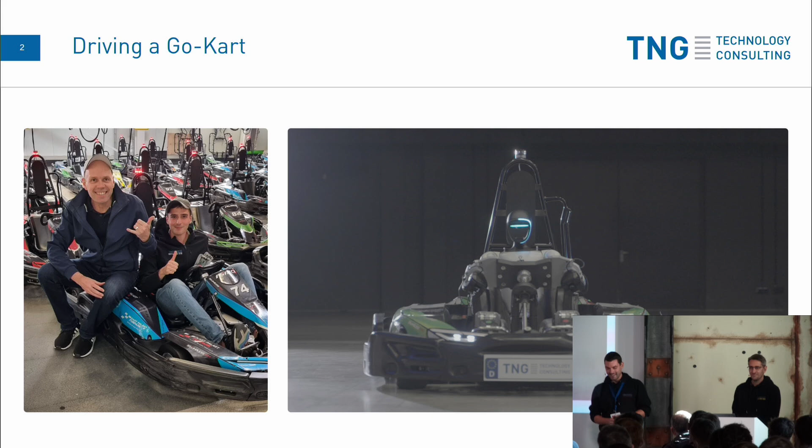But at least I have never heard the slogan, 'we're TNG and we fix your mechanics.' So we had to move quite a bit out of our comfort zone to make this happen. Let's see how we did.

Looking at the mechanical side of things, it's important when driving a kart to find a stable seating position to compensate for external forces while still maintaining the intended steering angle. For a human, this is quite intuitive because we subconsciously make little micro adjustments of our seating pose. But for a robot, this is a new task and not too easy.

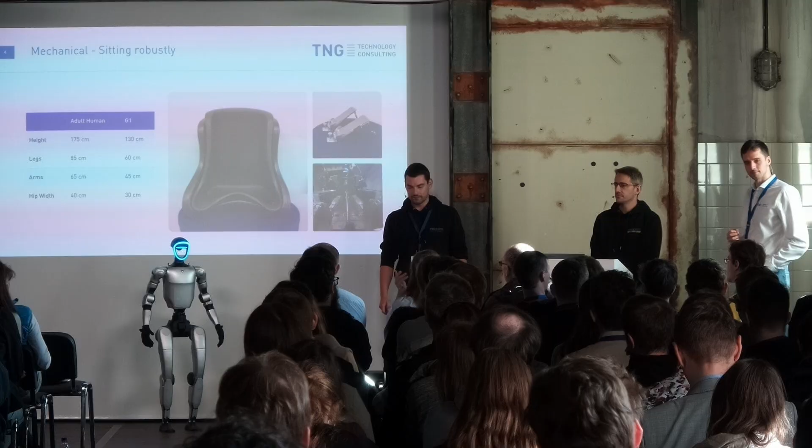The first thing that comes to mind when trying to seat this robot in the kart is that it's substantially smaller than an average human being. Indeed, when we placed the robot in the kart, it was sliding around a lot, within the factory setting of the kart that fits most humans.

Luckily, there's a solution for that exact problem, because children face the same issue once they are karting. By using not one, but two of those foam seat inlays for our go-kart, we found a good fit for our robot. The solution has the additional benefit of bringing the robot a little higher and more to the front of the kart, making the pedals and the steering wheel better accessible.

However, the pedals still were not reachable for the robot. Again, we repurposed a solution built for children, using pedal extensions that finally provided a perfect fit for our robot.

So now the robot has a nice seat and is able to reach the pedals. But what about the most central human interface in a go-kart? What about the steering wheel?

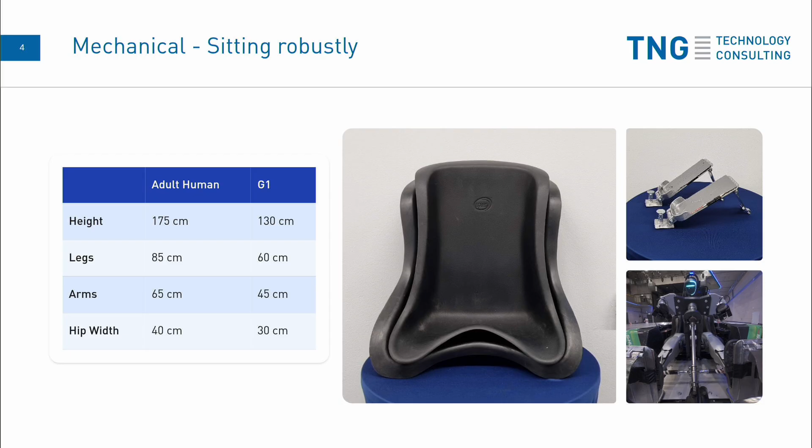Most steering wheels are built for human hands. And human hands are incredibly dexterous with 25 degrees of freedom and provide excellent gripping strength.

Looking at the hands of our robot, which is actually not this exact robot because this is the cheap version, it has just silicone hands without any motors. The robot that we are actually using in the go-kart has more elaborate hands, but it has only 3 fingers and about 9 motors, 9 degrees of freedom in one hand. These hands are obviously lacking the dexterity and gripping strength to properly grip the steering wheel and turn it.

To face this issue, we first broke the problem down to basically handcuffing the robot to the steering wheel, so it's kind of doomed to drive. This prototype was quickly built with a little woodworking and 3D printing.

This concept of just handcuffing the robot to the steering wheel worked so well that we kept it for the final solution, in which we just redesigned our 3D prints a little bit, but the concept stayed the same. This solution also has the advantage of further fixing the robot in its driving position, making all the downstream tasks way easier to solve.

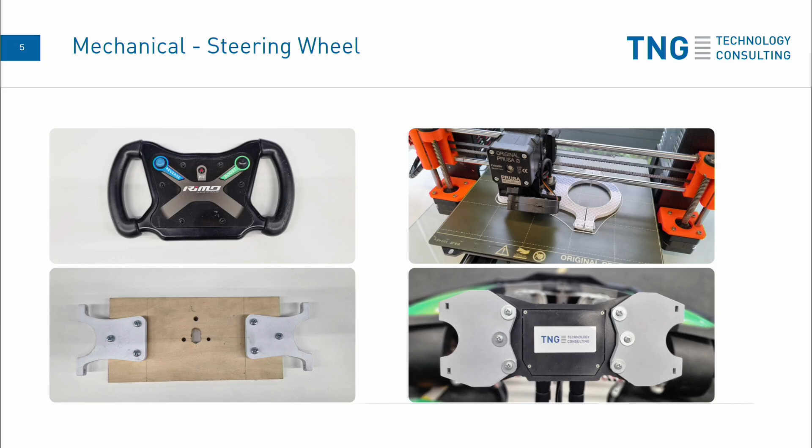All right, so that solves the mechanics. Let's look at the electrical adaptations that we had to make to our go-kart. With the original steering wheel, one can simply press and hold a button to drive backwards, and backwards is sometimes very needed for the go-kart because the driving radius is quite big.

And being handcuffed to the steering wheel, this wasn't an option for the robot anymore. Therefore, we had to mimic the button press in the low voltage system of the go-kart somehow. This is not too hard to do. We just used an electric relay controlled by an Arduino, and that worked like a charm, out of the box, no problem at all, easy peasy.

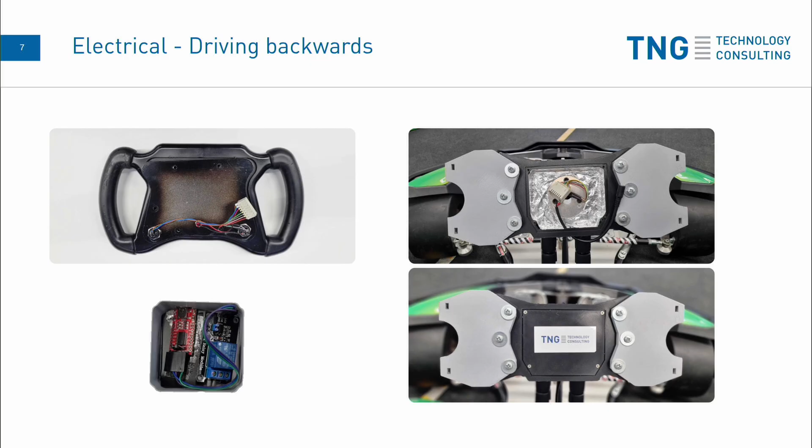But once we placed the robot in the kart and turned it on, the Arduino was behaving completely random. And we slipped into one of those feared debugging hells, didn't know what was going on, started questioning ourselves. But finally, we noticed that when shielding the Arduino with our bare hands, it was behaving deterministically again. So how can that be?

We finally came to the conclusion that the robot is producing such electromagnetic smog and radiation that this affected the electronics of the Arduino heavily. Now that we identified the problem, the solution was also quickly found. We just covered the insides of the housing of the Arduino within the steering wheel with aluminum foil, and that worked like a charm.

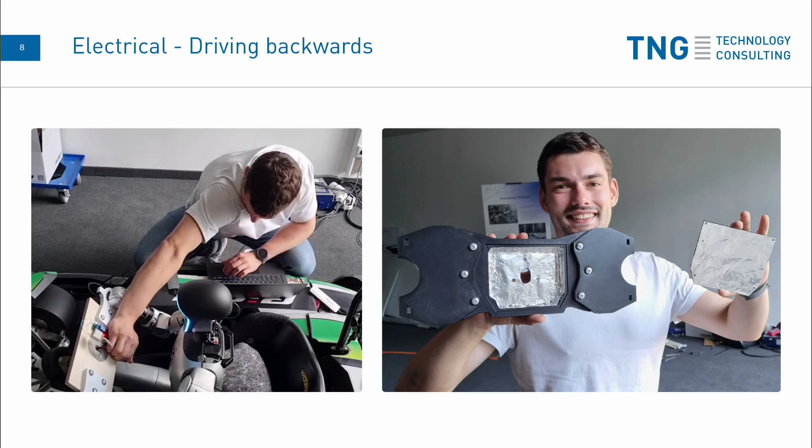So now that the electrical and the mechanical problems are out of our way, we can finally move on to our home ground and solve the hard IT problems. The first problem was that we couldn't move the joints, so we had to learn how to program the robot, and Unitree is providing an excellent SDK for controlling individual joints, and we can just send a target value to one joint. This directly solves the problem of accelerating and braking, because we only need one joint for that, right? So let me replay the video.

This is one of the examples when we first learned how to control a joint. We don't need more than just the ankle joint to press the pedals, and that's the solution that we are still using.

Ah, cool. Thanks, Thomas. Solve hard IT problems. Exactly. Yeah, so this is basically braking and accelerating at the same time. Of course, we do this differently now.

But steering is a little bit more complicated, because to steer the steering wheel, the hands have to perform a 3D arc trajectory while still maintaining the same distance between two hands. And to make things even more complicated, the pose of one hand is defined by the kinematic chain of one arm, which has 7 degrees of freedom compared to the 6 degree-of-freedom configuration space of one hand. This means that there are infinite solutions for each pose of the hand.

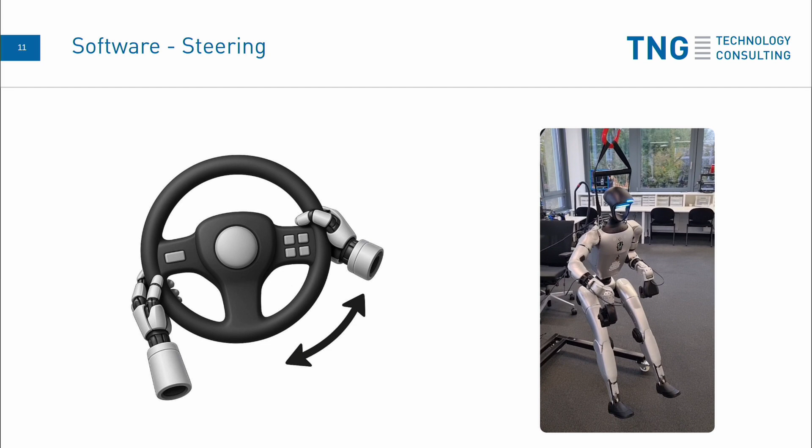Here you can see the robot booting and getting in its driving position, and you can see as it's lifting its legs, there's a lot of core strength now, and there you can see the steering trajectory being performed. It's a little jerky, but if the robot is handcuffed to the cart, that's enough.

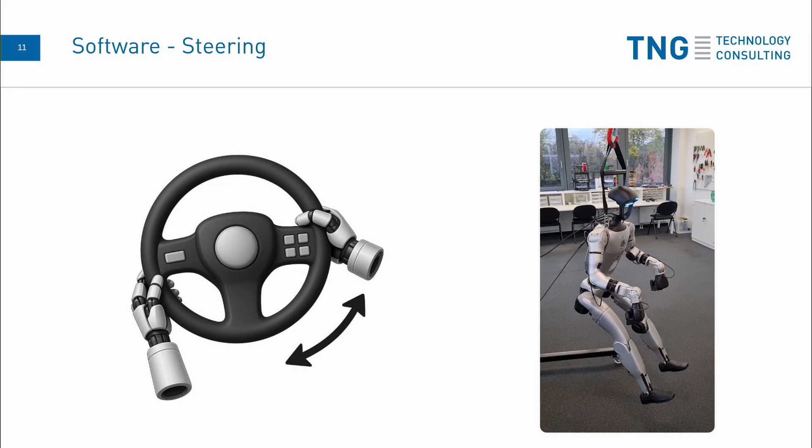And it looks absolutely hilarious if it does, a robot looking like that. Yeah, absolutely.

On a crane. Exactly. So now all components of driving the cart are solved and integrated in one system. And it's important to note that all those components are related across domains with each other, so changing something in one domain can have very well side effects on any of the other domains. We experienced that with our Arduino, because the mechanical decision of placing the Arduino close to the robot had massive effects on the electrical domain. Therefore, integration can be tricky sometimes with such systems and needs to be tested thoroughly.

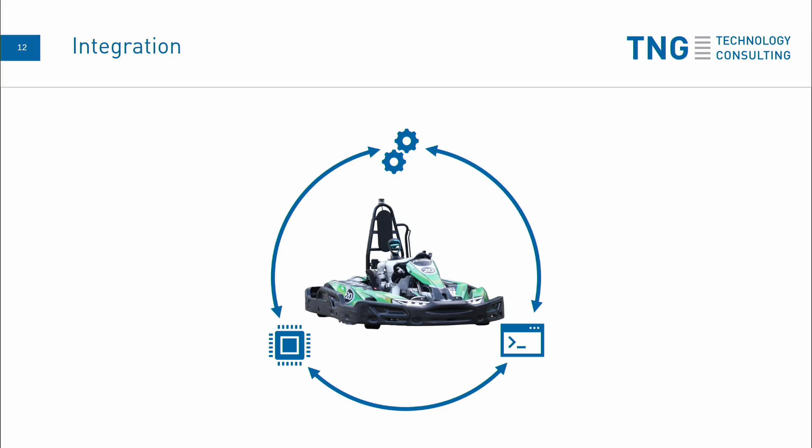However, now everything works brilliantly, and it's a lot of fun, and we can't wait to show you.

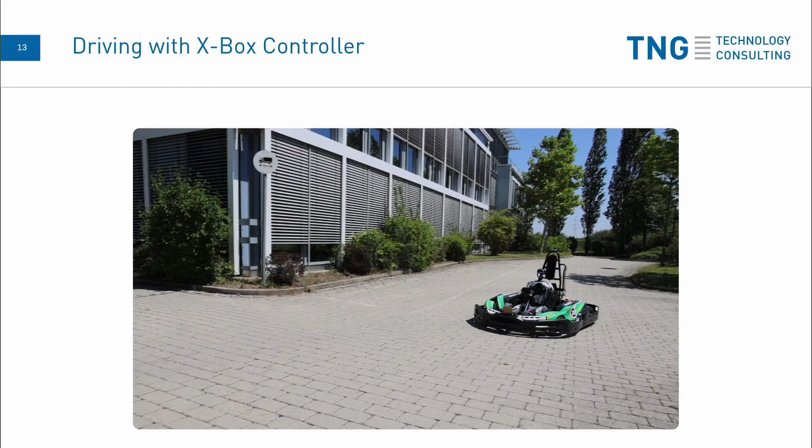So here's our first proof of concept, in which we just did a key mapping to an Xbox controller and drove the cart like an RC cart, and it's just amazing to see the robot drive the cart.

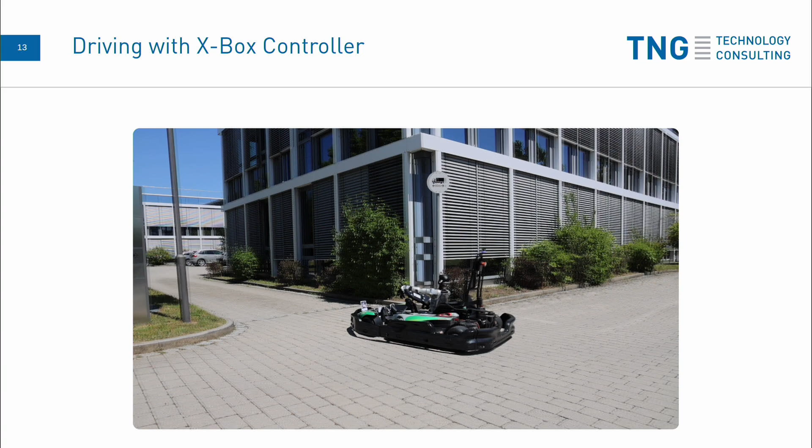Now that we've controlled the cart, we should also think about letting it drive autonomously. Therefore, we need a lot of different hardware, a lot of things to actually see the environment. And this is where the sensors of the robot come in.

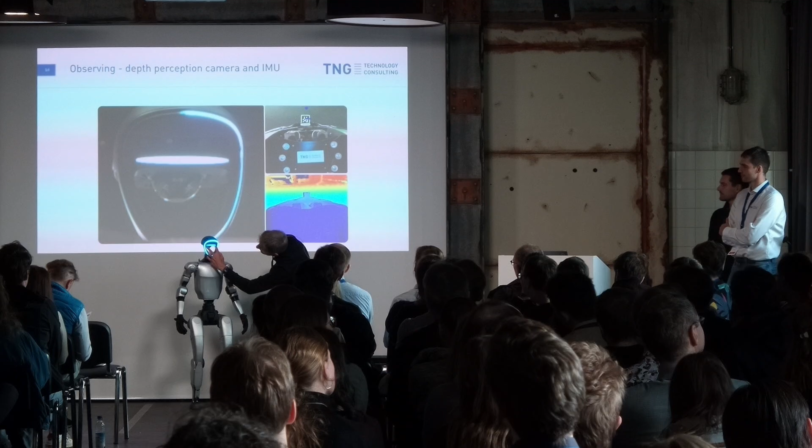Here you can see basically the most important sensors. If we have a look at the face, there's an RGB camera. Up here, there's also a few more cameras. Here's a LiDAR sensor, and all of those can be used to really control the car.

The RGB camera will basically work like a webcam, so you will have a picture like that. For the 3D perception, you will basically get the same picture as you have with the RGB camera, but with different colors, and the colors now reflect the depth that the pixel is away from the camera.

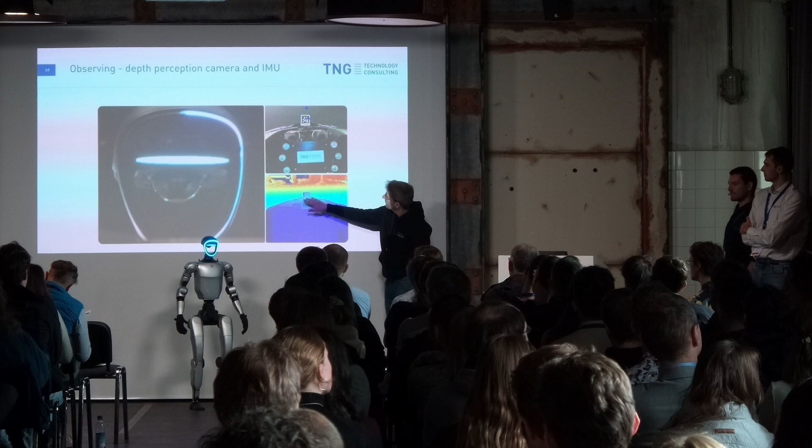This blue area here is pretty close to the viewer, and here we have something that is still close but not as close as the steering wheel here, and then the further away the object is, the redder the image gets. So this is basically like a heat map.

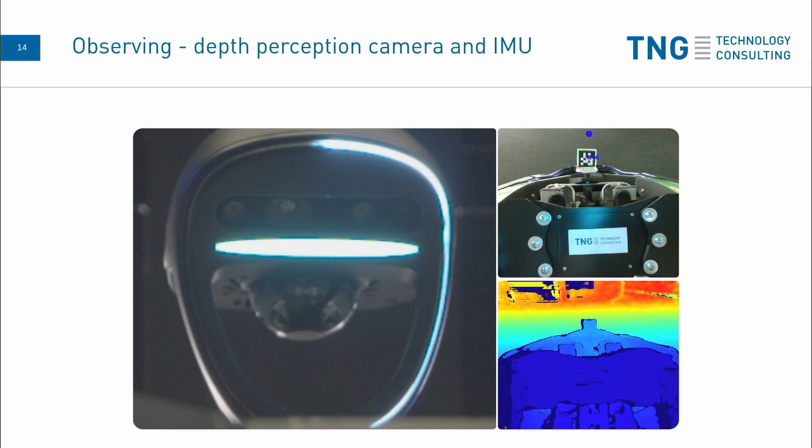If we want to do even more things with 3D maps of the world that we get, we will probably use the LiDAR, which is this thing down here. It is a 3D perception. It offers us a 3D perception of the world.

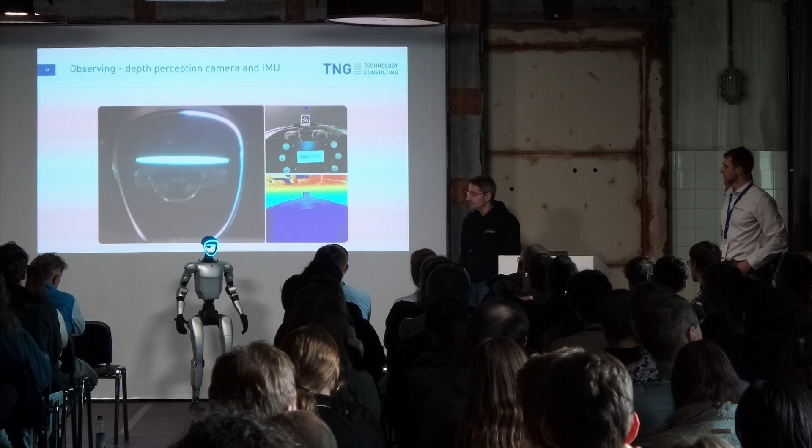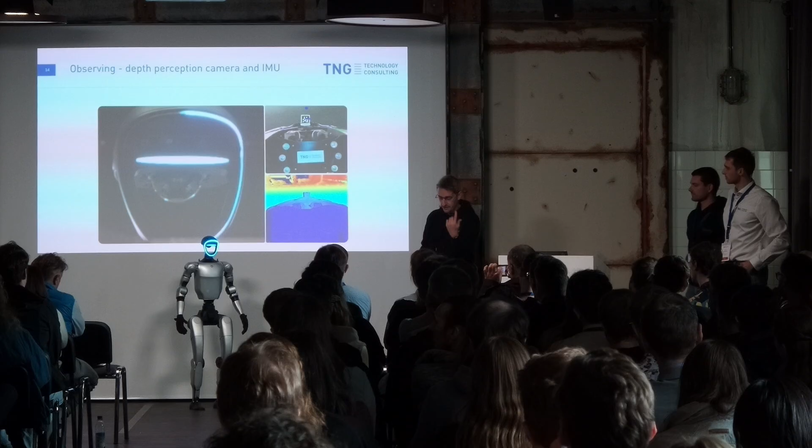What we get is normally a point cloud, and with this point cloud, for every point that we get, we have a direction that the laser this LiDAR is based on is currently turning, so it's turning around all the time and giving us feedback of the real world, and at the same time it also gives us the angle.

If you have this image now, you could reconstruct a 3D representation of the world around you with multiple sightings that might be possible using techniques like simultaneous localization and mapping, or in short, SLAM. And you can also combine that with other sensors to get an even more precise view of the world.

But we didn't need that actually for our first use case, which was somehow semi-autonomous driving, and this is what we did here. So here you can see basically the RGB image from the camera, and what we tried to do now is implement some basic line following algorithm.

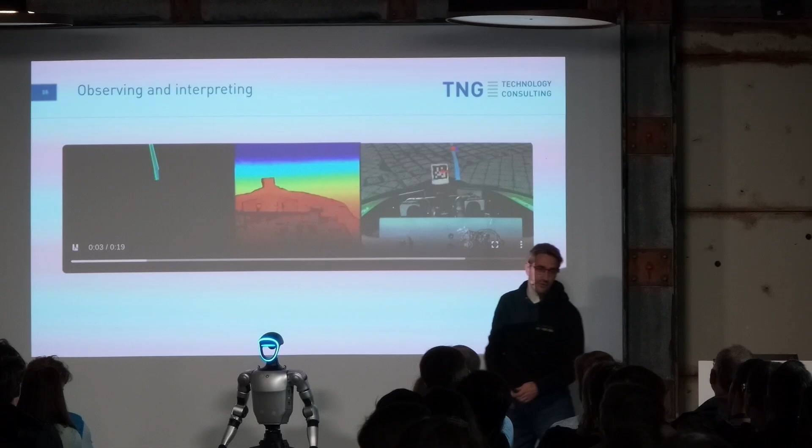And there the depth perception comes in, because we can just filter out everything that is pretty close to the camera. And with that, we can then just mask that out and just use the part that is relevant for us, do some line detection here, and we can then use some standard algorithm, Hough lines here, that you can see in the picture.

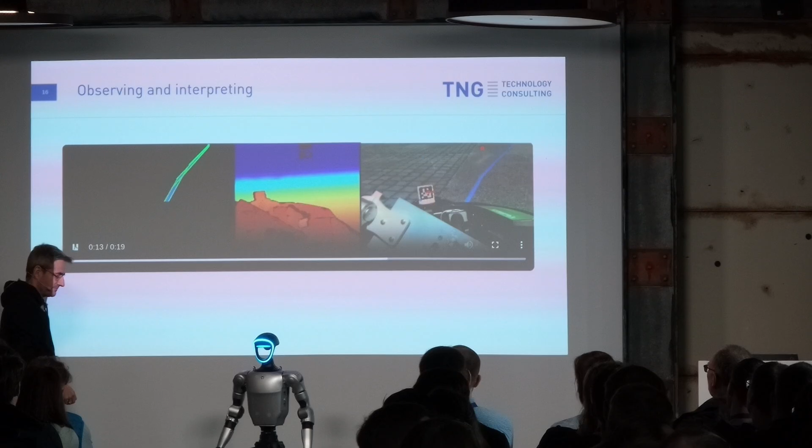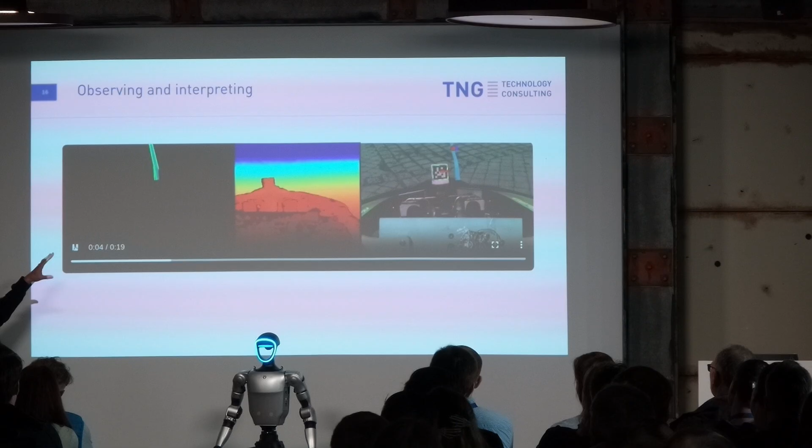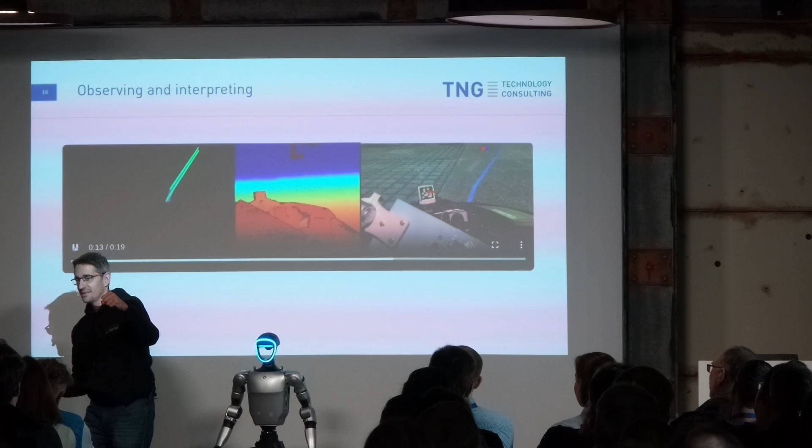With that, we can then move the cart relative to the line position that we have. Unfortunately, there's still a problem here, because, as Tobias said before, when the robot steers in this direction, it also moves its hip into this direction. So the camera, unlike with other cameras that we have on cars, is not always perfectly aligned with the center of the car. So we also need to find out where the center of the car is located.

And that's where this beautiful part comes in. So this is an ArUco tag. It looks like a QR code a little bit.

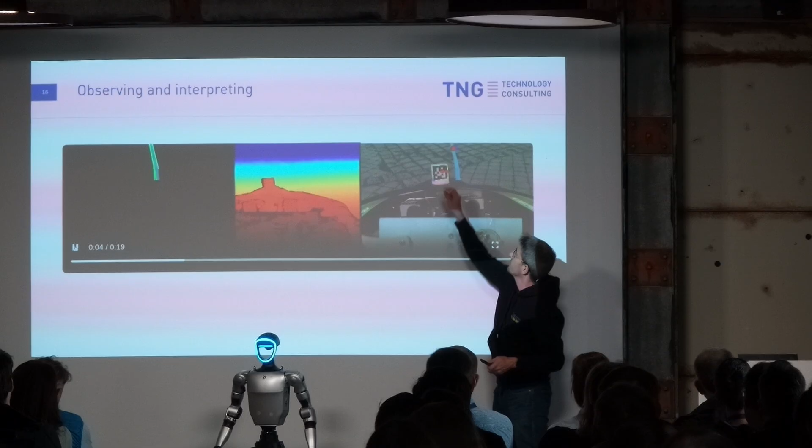We can detect that using open computer vision libraries like OpenCV. With that, we now have the center of the car, which is the center of the Aruco tag, and the center of the line where we need to go. With that, we can then define in which direction the car will be steering.

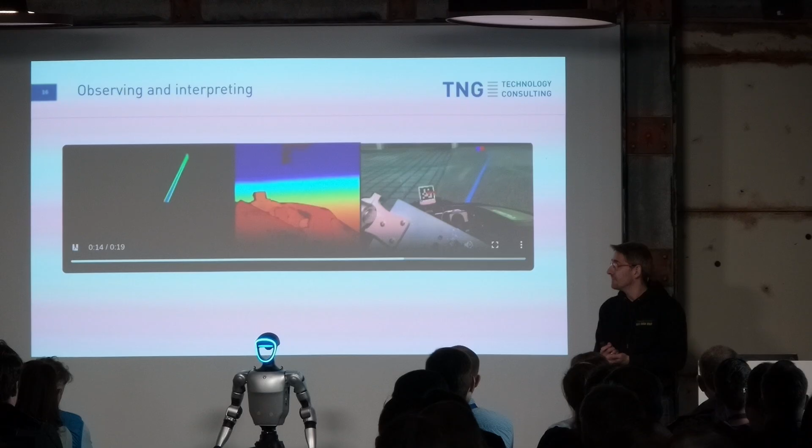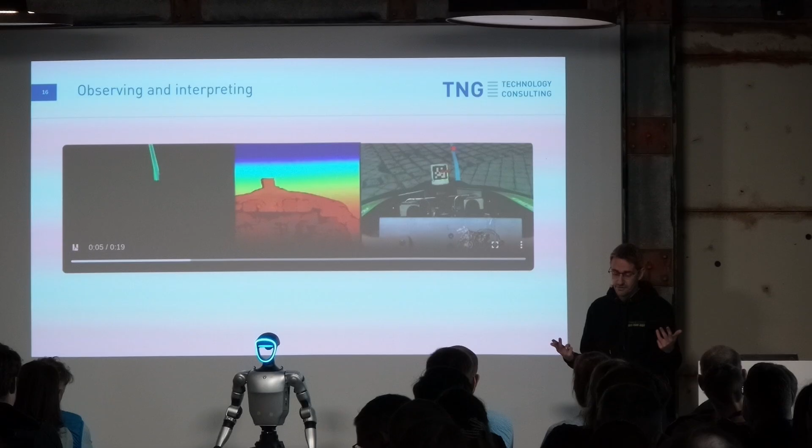So what else do we need to make a robot do all these things? There are three main parts which contributed to the revolution in robotics, which made this little robot possible.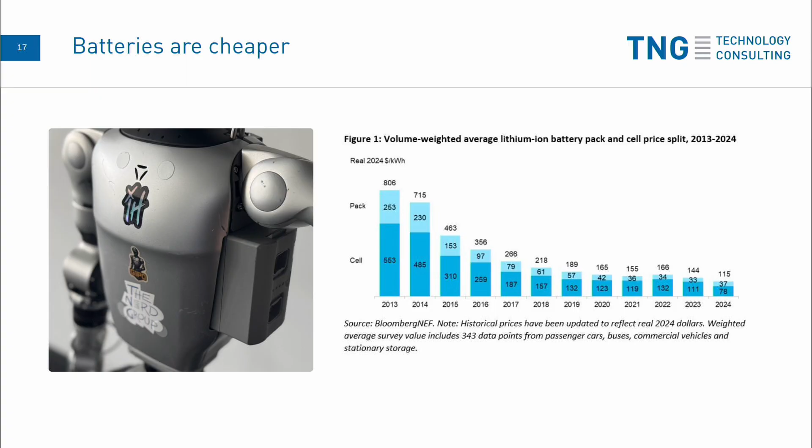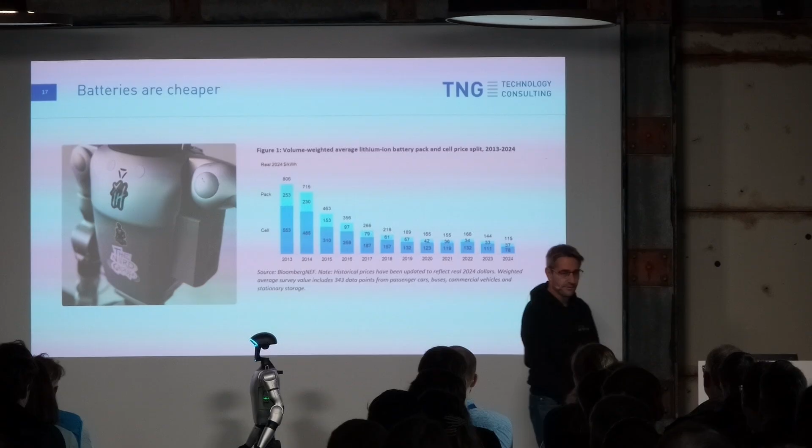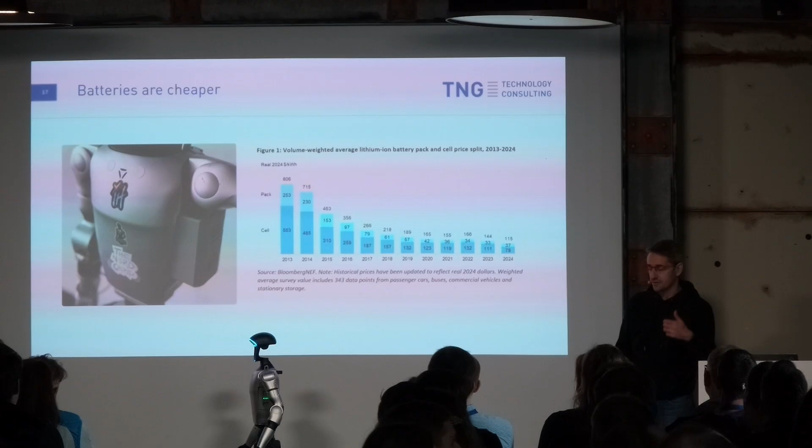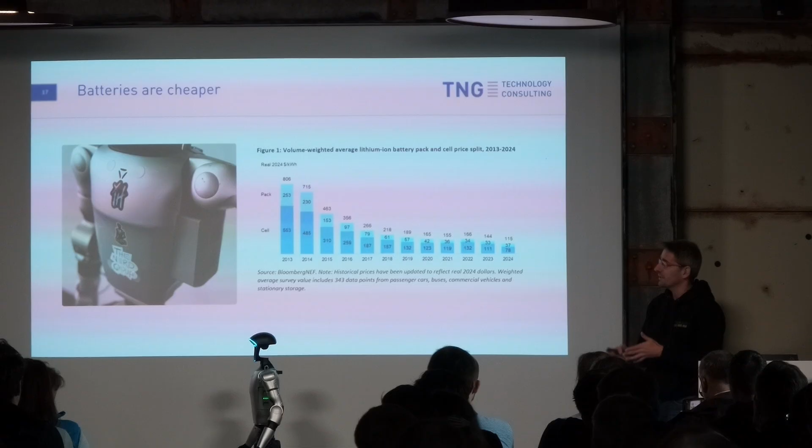The first thing we need is the battery. If you turn around, you can see underneath the elbow there's the battery. The battery is pretty small for such a huge amount of power that it hosts, and this has changed in the last few years. Battery density has gone up significantly, so we need less volume and less weight for the batteries of the same capacity. This is one of the key drivers why we can even do this today, and at the same time the price has also gone down, which enables even us as TNG to own such a robot.

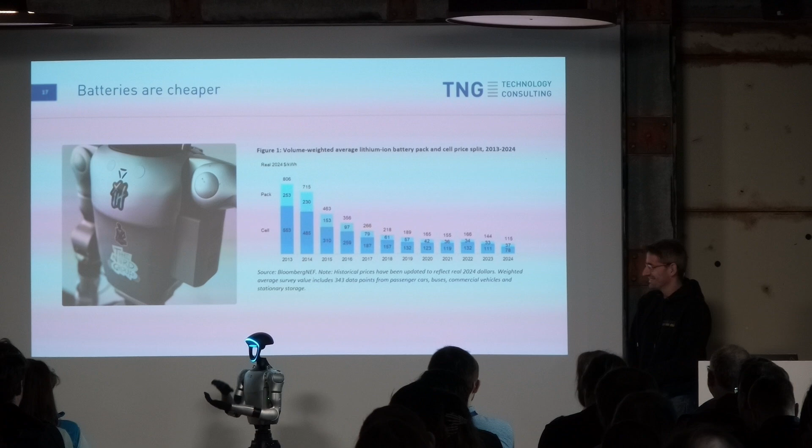If you look at this arm, first we have the shoulder motors here, then we go down to the elbow motors, then some wrist motors for the more advanced one, then motors for the fingers, and so on. All of this weight has to be lifted by the shoulder motor, while at the same time it also has to provide extra lift to carry out its own task. This kinematic chain that we have with these advanced robots is pretty hefty.

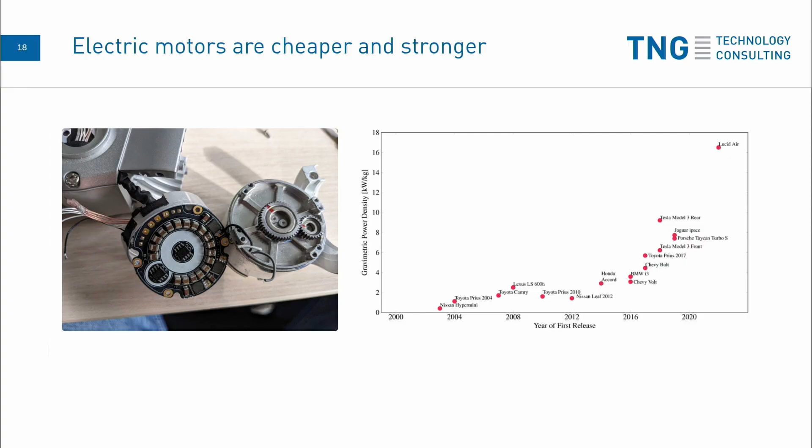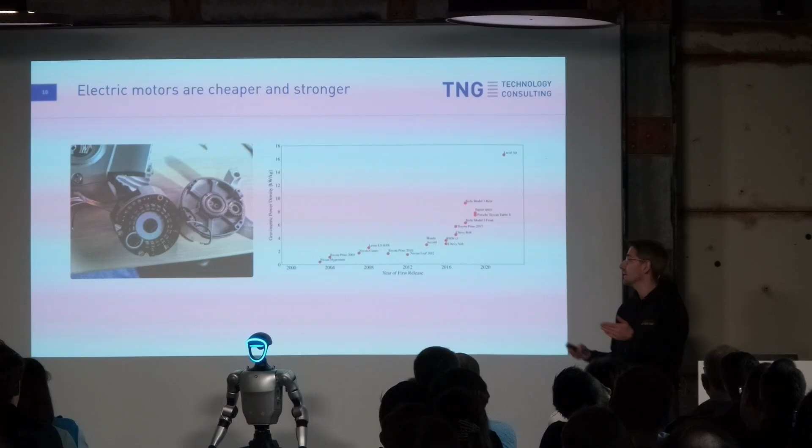And with that, we also need very strong motors. With the upcoming of neodymium magnets in these motors and some other advances, we've gone a long way from the motors we had in the 2000s to what we have today. This is of course also due to the advances in the car industry, which is somehow the driver of this whole revolution in the electric motor.

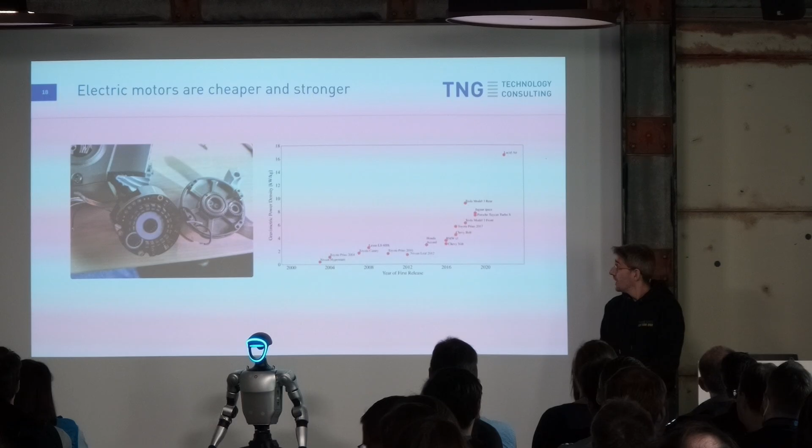The last thing, pretty obvious but nevertheless very important, is that we also need some compute power within this robot. You cannot just have a microcontroller in there - in order to have some serious AI going on within the robot, you need real compute power. Nowadays it's possible to have very advanced chip card-sized computers that also offer us the possibility to process neural networks inside, with some pretty interesting VRAM specs and so on.

This is of course an ongoing thing, it has been going on since the 60s or something like that. But nevertheless, it is also possible to be completely autonomous for the robot this way.

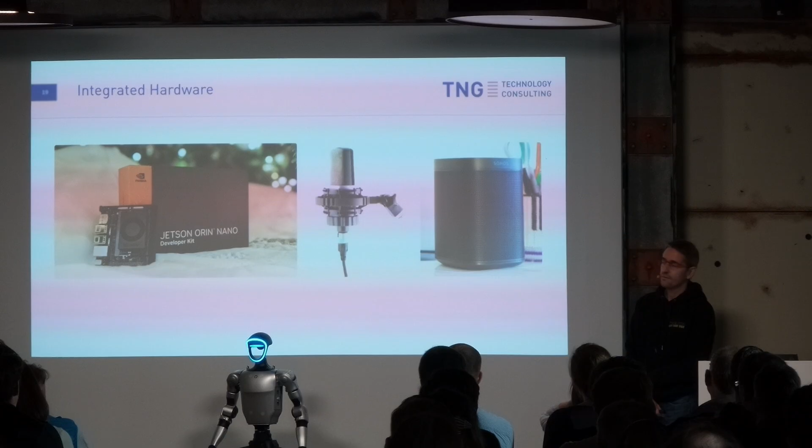And then, if we want to talk to robots - the use case I want most is a robot that brings me coffee, so I also have to tell it to bring me coffee. The idea behind that is of course that it can also hear me and talk back to me. For that we don't only need the neural networks, like speech-to-text or text-to-speech, but we also need microphones and speakers in the robot itself, which it also has.

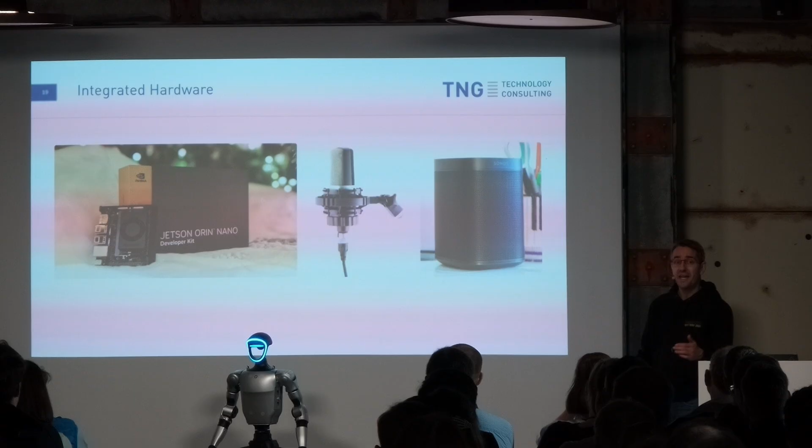So now that we know what we need, now that we have some software to do that, and we can also drive the kart, what did we actually do with it? One thing is we went to the Deutsches Museum with it, and here you can see some pictures from that event. We tried to put a smile on a few kids' faces and make them think about robotics a little bit more.

You can see that we walked around with the robot, and we also drove around with it. We blurred the license plate - not sure why we needed to, but nevertheless, okay. One reason I think we blurred it is we also put some children on top of the kart and let them drive with us, but that's a different story.

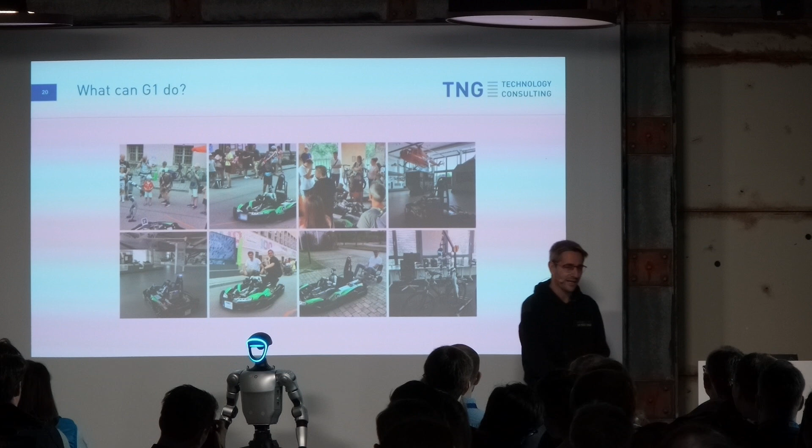Nowadays, it's not even necessary to put the trolley on the sides of the robot. We can also have a trolley in the back, so you can relax and enjoy your trip with the robot who is driving itself.

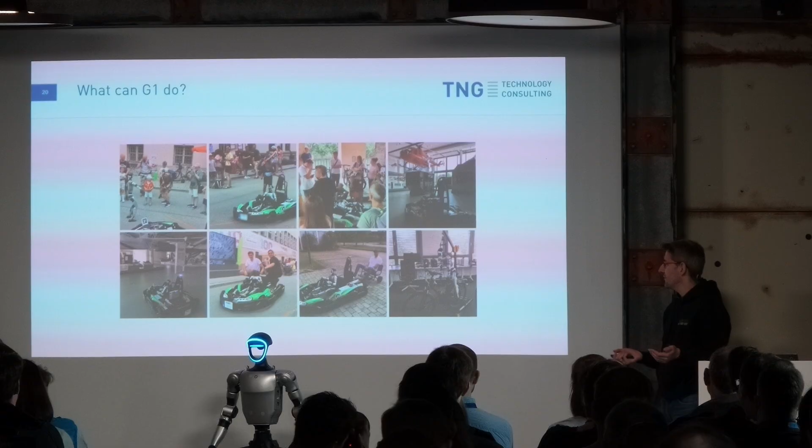And nowadays we are also trying new things out. So we're putting the robot on a bike and letting it drive the bike. Unfortunately, this work is currently ongoing, so it's not finished yet, and it also broke the bike already once.

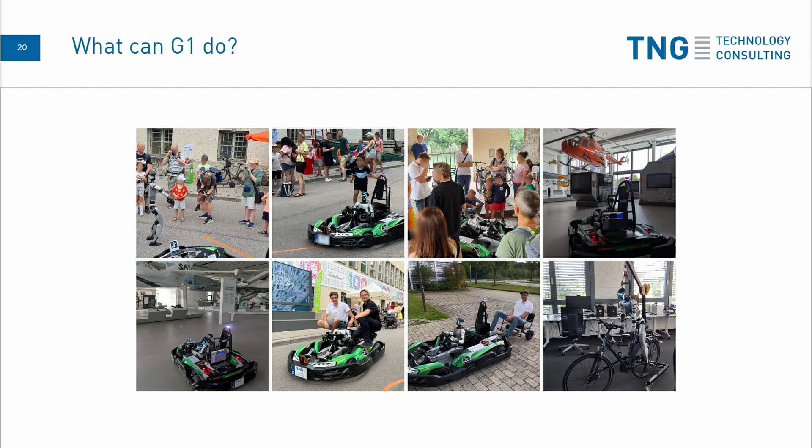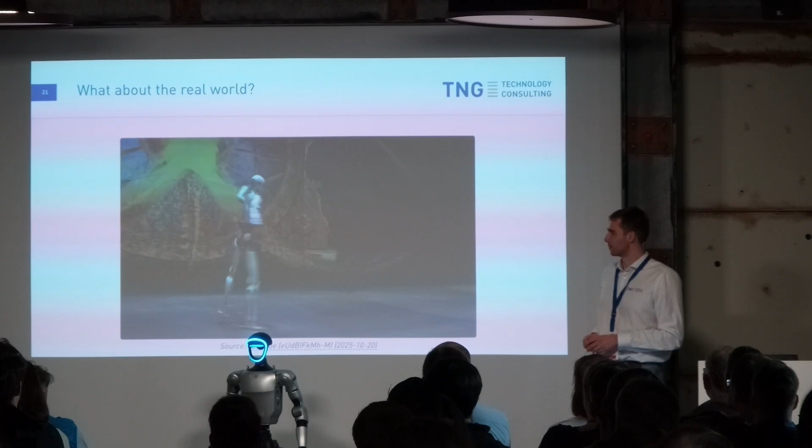Right, so the advances are amazing. We have these humanoid robots that are consumer products that can do, I mean, this video is buffering, but the robot is really smooth. They can do these sort of amazing looking movements.

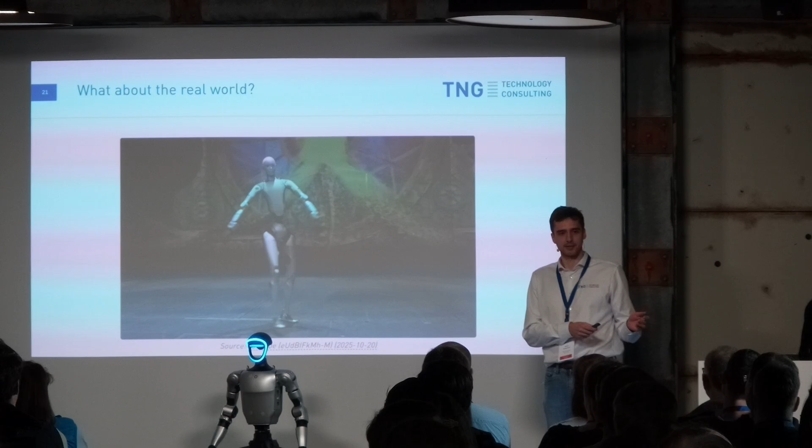But I want to go back to the original question, which is, to what extent can they be helpful in the real world and use the world that's made for humans? I'll consider an example: would you have this robot bring you coffee or do work with you inside your home? So the most important thing for having a robot at home is that it's safe.

Right, so bugs happen. At the moment, these humanoids are fairly complicated, and enthusiasts are programming them, but they're not particularly safe. Bugs happen. But even worse than that, if they're controlled by a human, it's fairly hard to program them so they're precise, and for humans to control them precisely.

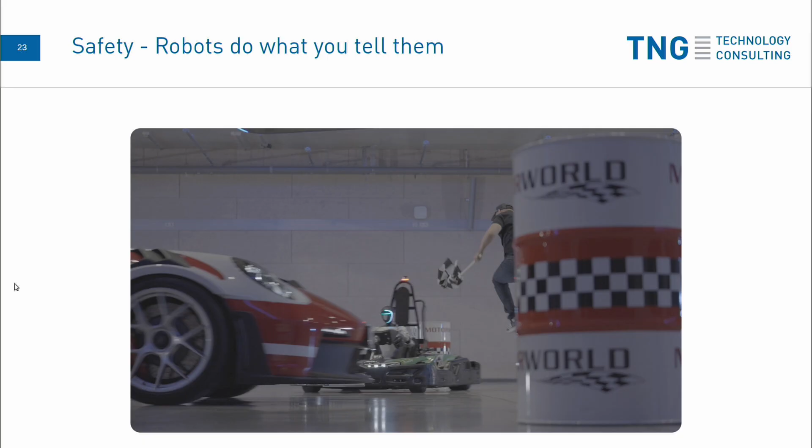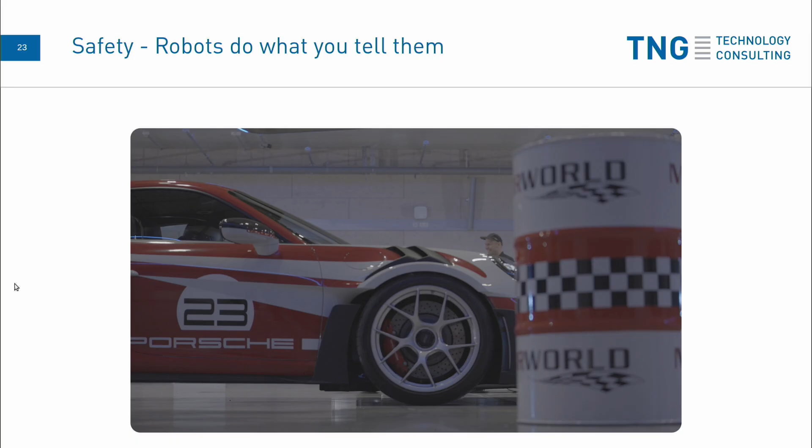So here we were filming a race between a go-kart and a car. But the floor was slippery, and I misjudged how much I should turn into Henrik, and he had to jump out of the way. But I'm glad to say we haven't had any accidents, and we only operate at 30, 40 kilometers an hour when everyone's paying attention. So safety is important, but even if humans are controlling the robot, it can be unsafe.

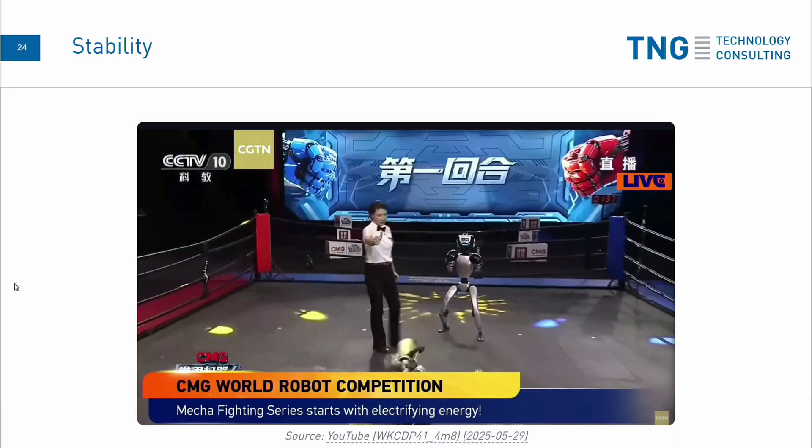The next point is stability. So these boxing matches are again super interesting, but they point to a very important thing, which is you have humanoids on 2 legs, which means you always need power in order to be stable. If you have this at home and a dog, for example, runs into it, you have the risk of it falling over and really damaging your property, which obviously isn't desirable.

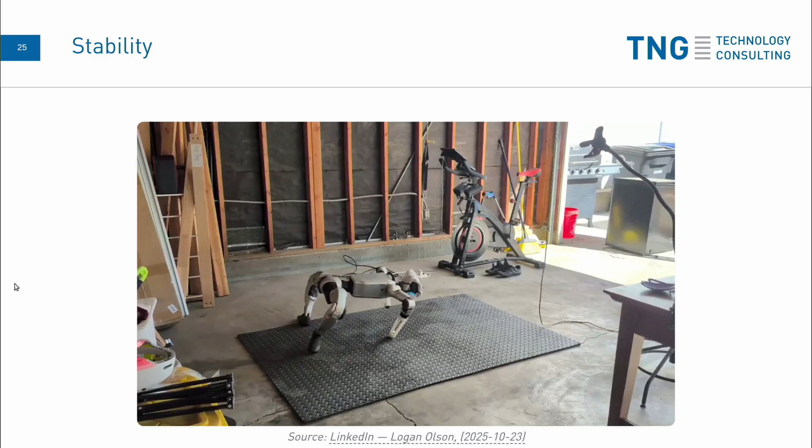And there are several ideas of how to cope with this. One of the points is you can reduce the center of gravity by using the hands also as legs. This is a video from yesterday. It's exactly the same robot, but not creepy at all.

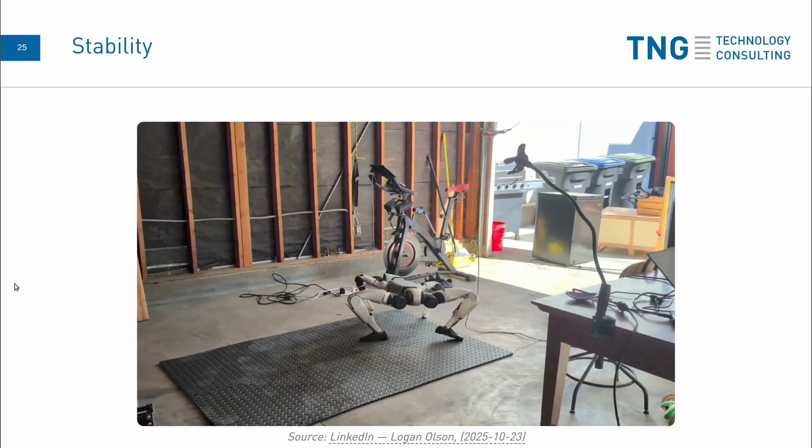But it's been made safe for home use, sort of. More generally speaking, you can lower the gravity, but actually, if you've got flat surfaces at home and no obstacles, you can replace all of the legs with just a wheeled system, which is very stable, and then you maybe have the intelligence of the arms and the camera to do the work that you wanted to do. But at least it's a step in the right direction of making these humanoids safer.

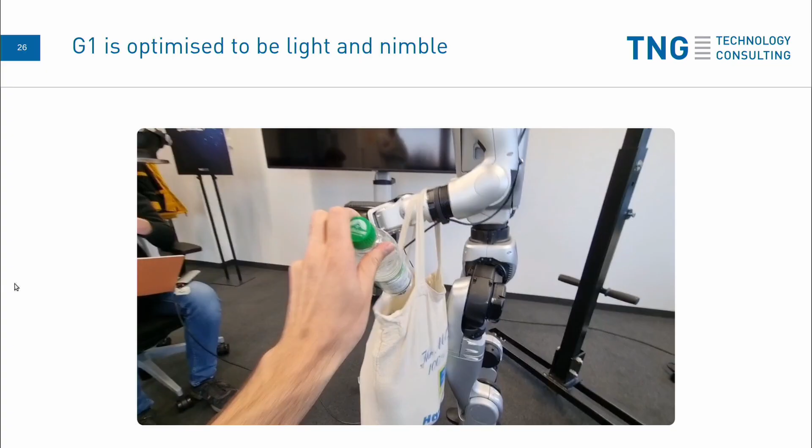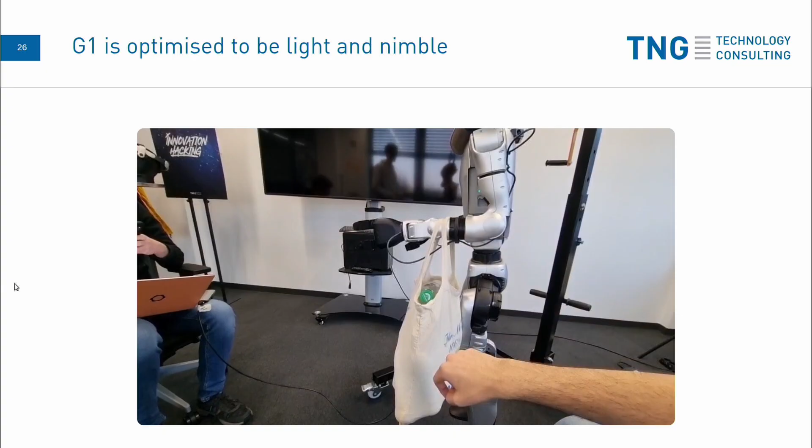Here I was doing a gym session with our robot. We were doing lifts. Before we bought the G1, I wanted to measure how much torque the elbow joints could produce, so that we could make sure there was enough torque to steer the steering wheel. I filled up a bag with bottles of water and measured whether all of the joints could still work. We realized it has just about enough torque to turn the steering wheel of an adult go-kart, but it wouldn't have enough strength to, for example, lift a 5 or 10 kilogram rucksack that you have at home. So you're fairly limited. Even though the motors have gotten a lot better, they're not perfect yet.

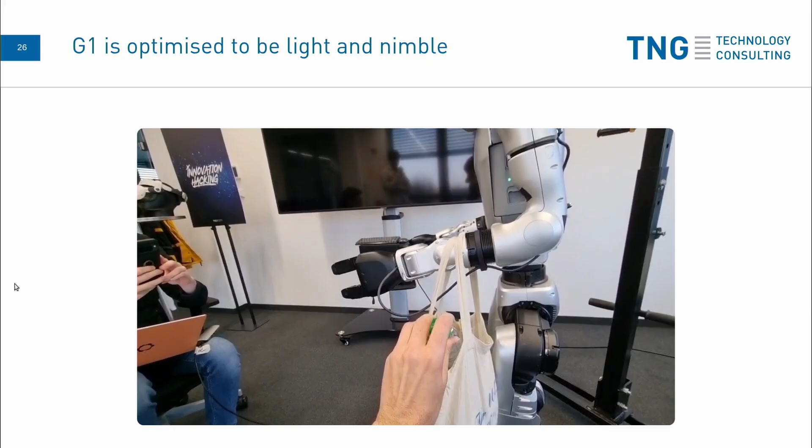And this is an active decision by Unitree. The G1 is sort of light and nimble. You can put in stronger motors, but then again, you have more weight and more risk of serious injury. The motors are just about strong enough to steer a steering wheel, but they get damaged quite easily, the elbow joints, because you're sort of operating at limits. In fact, just before one of our presentations, the robot broke, and we had to replace the motors.

Here the thing is, these Unitree robots are fairly new, which means getting the components you need to replace it is fairly difficult. The delivery times can be several weeks, and it costs several thousand for the motors. But replacing it is actually fairly easy. You can just unscrew the forearm in this case, cut some wires, and then solder on the replacement part.

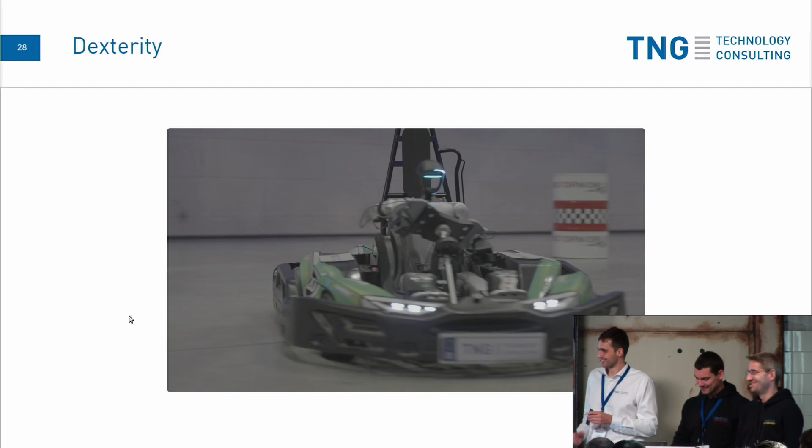Oh God, yeah, that's not gonna be a good driving experience. I think he needs to do a test first.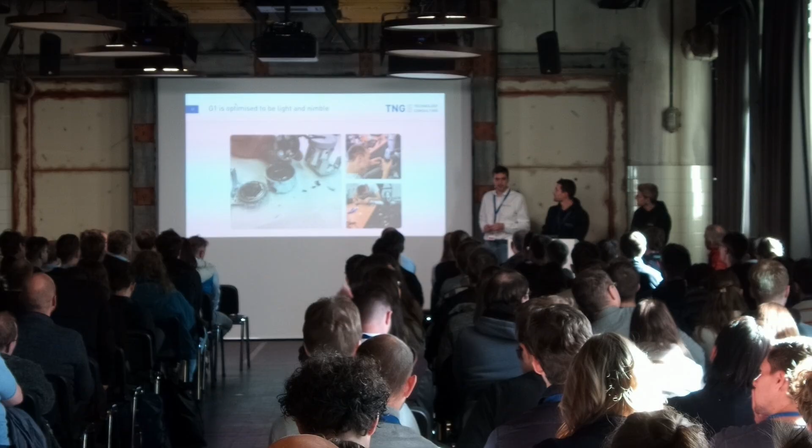This was loads of fun, we've really enjoyed doing this project. A lot of it was done in the evenings and at night. But I think you got an impression for how humanoids have changed. They're now consumer products you can just buy, and the cost has reduced by about a factor of 10 in the last 3 years.

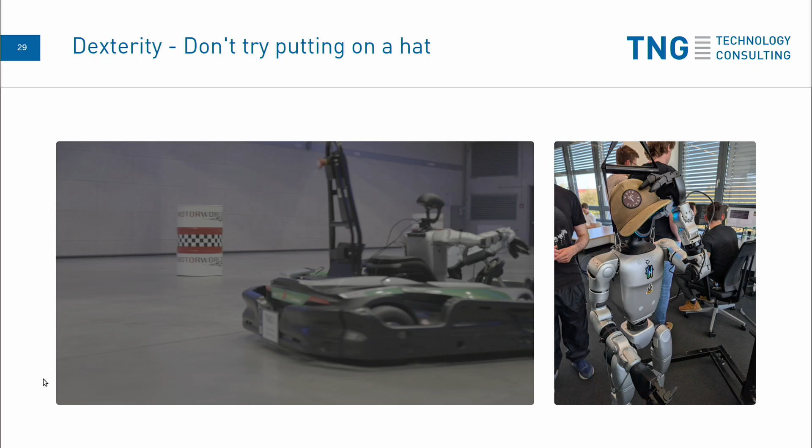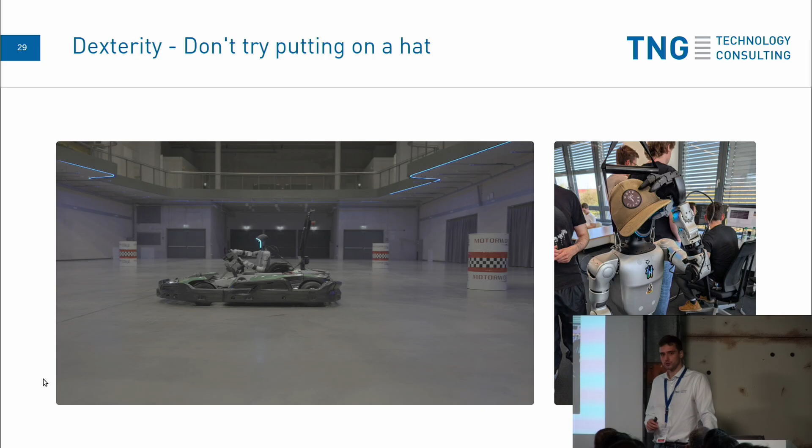One point before I finish: I was asking to what extent can I use the world made for humans? One thing that isn't working yet is dexterity. We had to lock it into the steering wheel, which allows us to do this drifting here in Motor World. But precision tasks requiring dexterity don't work yet. One thing we tried was teaching it to put on a hat. To do this you need to understand the geometry of the hat, where exactly to grip and how precisely. That's actually a much harder problem than teaching it to drive.

So, summary: consumer products are absolutely amazing. You can get one, it's just 20,000 euros.

We've had a lot of fun doing this. One thing I realized was TNG is known for software, AI, and cloud, but not so much for the mechatronics stuff. But actually we have loads of PhD students, or people who did their PhD in robotics, and it's been quite easy to debug because all it involves is asking one of these people what to do, and they tell you exactly what to do.

Maybe you'll see loads of great videos in a moment with robots doing things, and I should point out a lot of the time it's not autonomous. Usually you have a human doing it, and the reason is they're not intelligent yet, so they're not yet suitable for the human world because they're not smart.

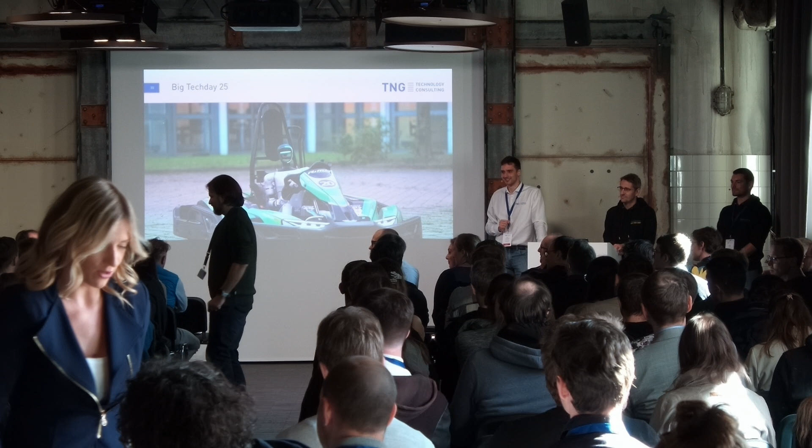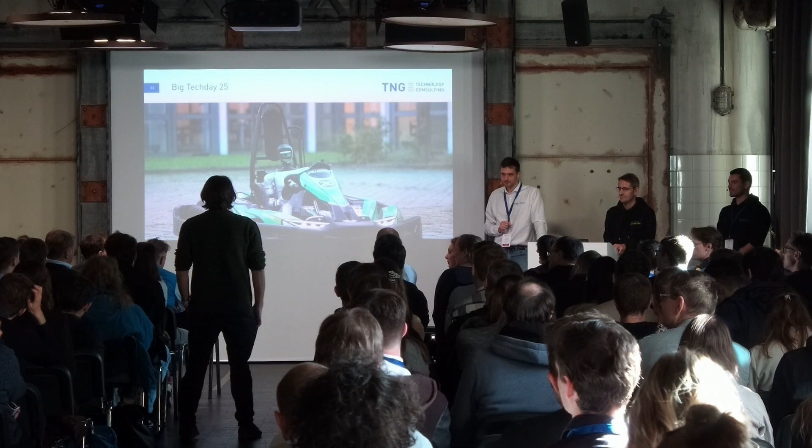Thank you for this talk. My question is about the spontaneous movements we observed during your talk, were they pre-programmed to keep our attention, or is it like the wishes of the robot to do it?

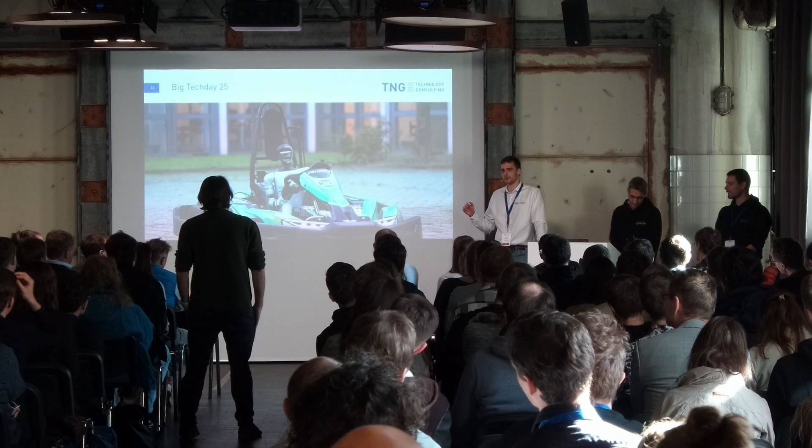I'm not sure it's the wishes. In order to stay stable, sometimes you have to make micro adjustments. I think it's something like the wind moving, so it's just adjusting its feet. But the thing it was doing with the hands was the operator making jokes.

Can you use these robotic foundation models to control these robots? Yes, that's the plan actually. We want to control the robot with robotic foundational models. This is also what our next talk is about at 4:15 today, where we'll talk about how to apply that not only to these robots but also other robots. The main idea we had when buying this robot was to really use robotic foundational models to make me coffee.

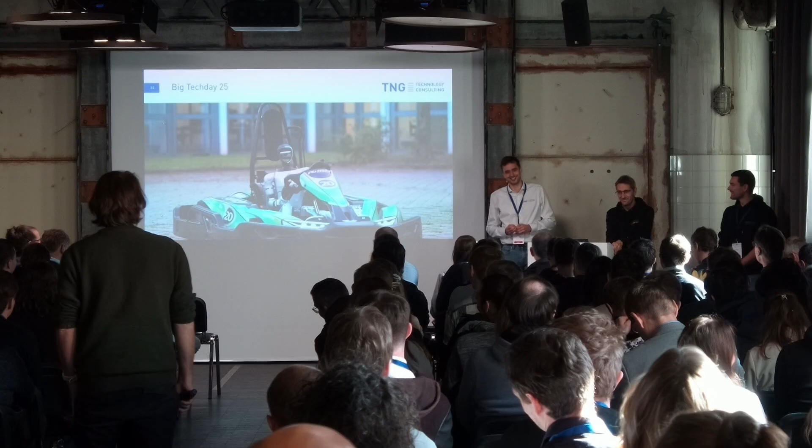We actually already tried deploying a foundational model to our G1, and it kind of worked, but not well. Again, robot foundation models are very much about data, and it's hard to collect data for this robot because there are no great fine-grained remote control options yet, and the simulation frameworks we have aren't advanced enough to produce good training data for it. This is the main issue we're facing.

All right, with that we leave you with one last thing. There was a short scene from this movie already in our talk, and we recorded a robot racing a hypercar, the Porsche GT3 RS, and we made a little video about that, and that was a lot of fun. Let's have a look.

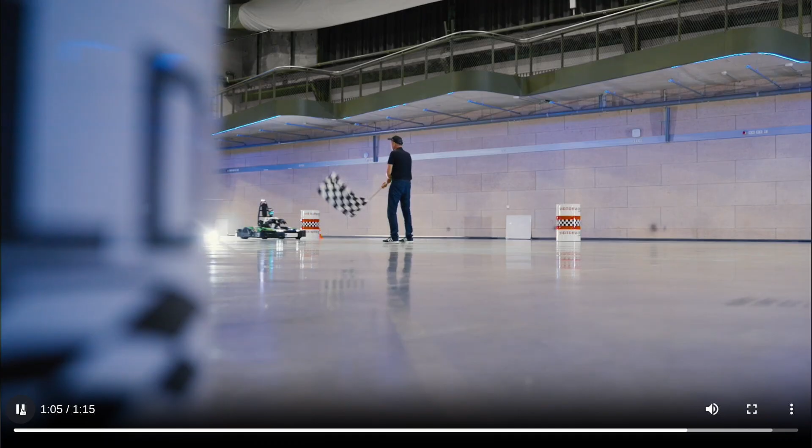Okay, I think the robot had enough time to prepare now, and we can actually see him live in action at the Motor World. At the entrance, we set him up, and if you walk with us to the Motor World, we can then have a look at it.